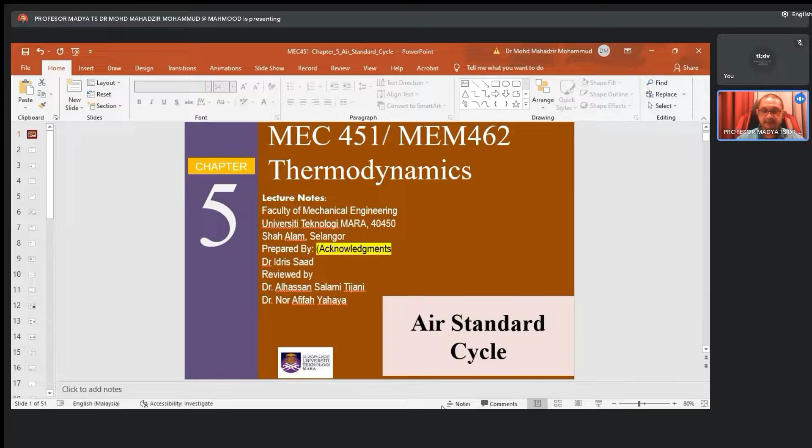Today class, we will discuss the diesel cycle, the ideal cycle for compression ignition engines. For your information, for this topic the outcomes for students is that you should be able to solve problems based on the diesel cycle.

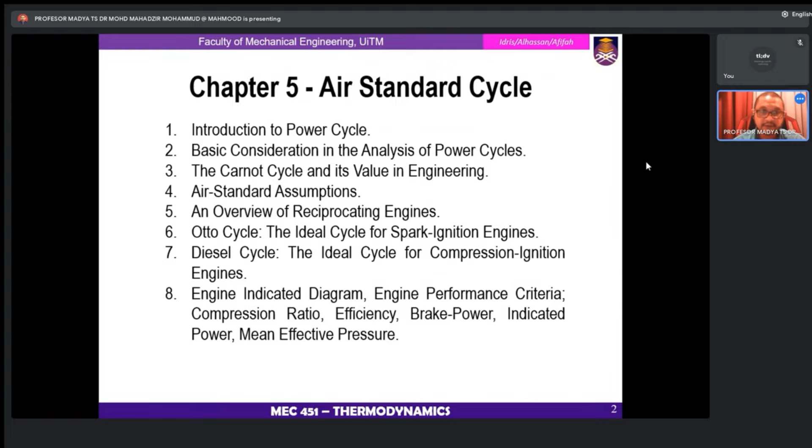Introduction to diesel cycle. Diesel engines, or correctly known as compression ignition, or CI engines, is an internal combustion engine (IC) in which ignition of fuel that has been injected into the combustion chamber is caused by the high temperature which the gas achieves, i.e. the air when greatly compressed.

At adiabatic compression. So the diesel engine was proposed by Rudolf Diesel in 1892, which would require much higher compression than is needed for compression ignition. So this idea was to compress the air so tightly that the temperature of the air would exceed that of combustion.

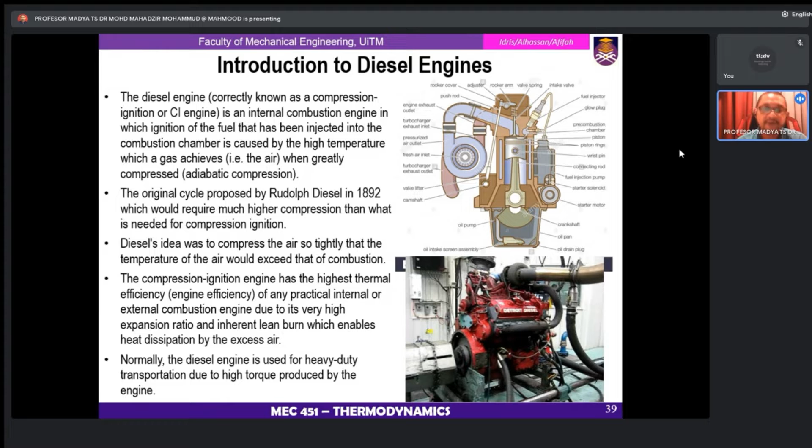This engine has the highest thermal efficiency of any practical internal or external combustion engine, due to its very high expansion ratio and inherent lean burn, which enables heat dissipation by the excess air. So normally these engines are used for heavy duty transportation due to high torque produced by the engine.

So for CI engines, it also has four-stroke engines. Basically, the difference between diesel engines and gasoline engines is that in diesel engines, the fuel is sprayed into the combustion chamber through a fuel injector nozzle, just when the air in each chamber has been placed under such great pressure that it's enough to ignite the fuel.

So when we want to make a comparison between gasoline and diesel engines, one of the factors that's different is that in the diesel engine, it has a fuel injector that is placed where the spark plug is in gasoline or petrol engines. As you see in these pictures at the right, this is a view of what I'm talking about.

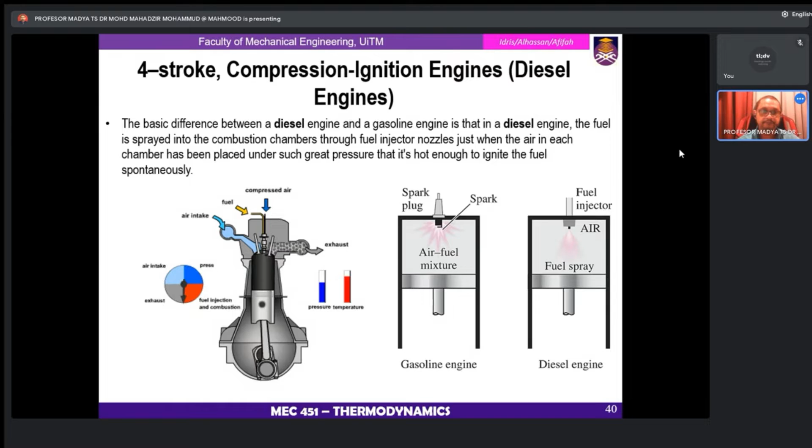At the left side, this is the process or what happens in the cross section of the diesel engine. For four-stroke engines, as we learned in petrol engines, it has four processes. It's the same in the CI engine or diesel engine. For four strokes, it's also the same as petrol engines. This is what I'm talking about with the four-stroke engines.

Stroke number one is the intake stroke, where at the left side, the air has been inducted into the combustion chamber, and in this situation, the intake valve is opened.

Then at stroke number two, the compression stroke, the intake valve closes and also the exhaust valve closes, and the piston in the cylinder will compress the air until it comes to the power stroke.

Process number three, or stroke number three. At this situation, what happens is the fuel is injected into the combustion chamber, and the fuel and the hot air from the compressed air will burn itself, and then push the piston downward with a powerful combustion.

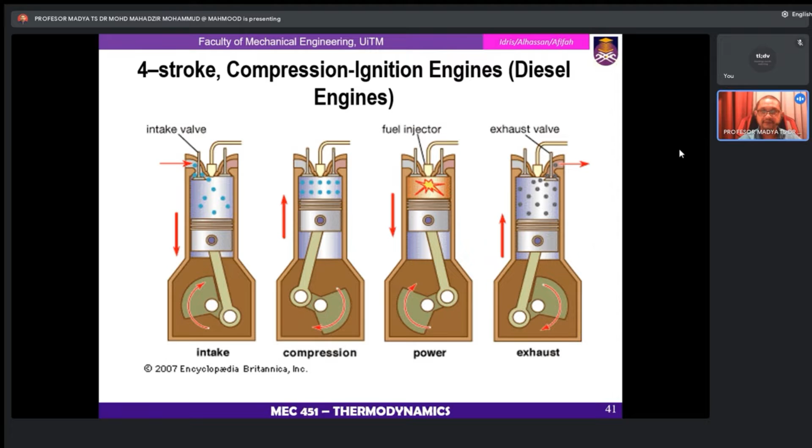And then lastly, for stroke number four, the exhaust valve will be opened, and then all the mixture, or combustion mixture, will be pushed out to the environment within the exhaust, through the exhaust valve and also to the exhaust. That is the process of the four-stroke diesel engine.

For the thermodynamics, we want to discuss or learn about the analysis and the calculations based on the compression ignition engine, and the cycle that is compatible for these compression ignition engines, or diesel engines, is called the diesel cycle.

At the left side is the actual process that happens in the diesel cycle, when we draw or get the result from the engine indicator diagram. But when you want to make the analysis and also calculate some of the efficiency of this engine, we have to make, or we have to consider, some assumptions.

Okay, so to do so, you have to assume, or you have to make the cycle as an ideal cycle - the ideal diesel cycle, as shown on the right side of this slide.

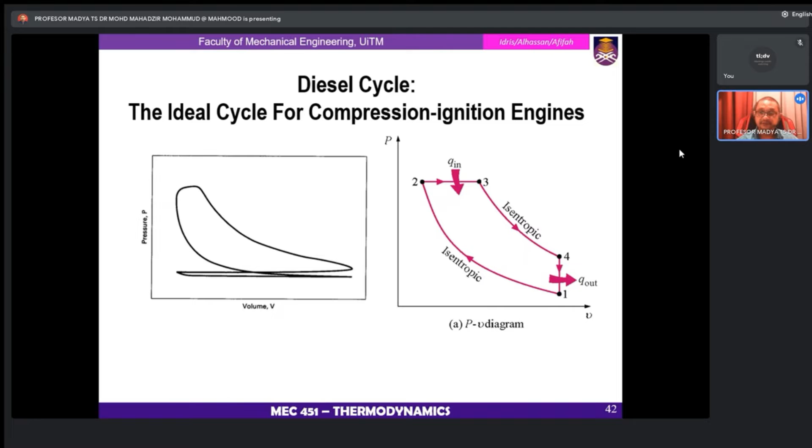To analyze these processes, some related formulas can be used, same as for petrol engines. For isentropic compression, you can use the formulas for the isentropic process in gas phase - that means three properties related formulas: ratio of pressure, ratio of volume, and ratio of temperature, because these three properties can only be used in the isentropic process. At this situation you can also calculate the work for process 1 to 2 using this formula, which is for isentropic compression.

For process number 2, the related formula used is Q in - that means the heat applied to the diesel cycle or diesel engine. To calculate Q in for this system, you use the formula mCp delta T. I will explain how to get this formula, and also from the general equations of combustion efficiency, or using mass of fuel and the calorific value of the fuel, you can also calculate the Q in.

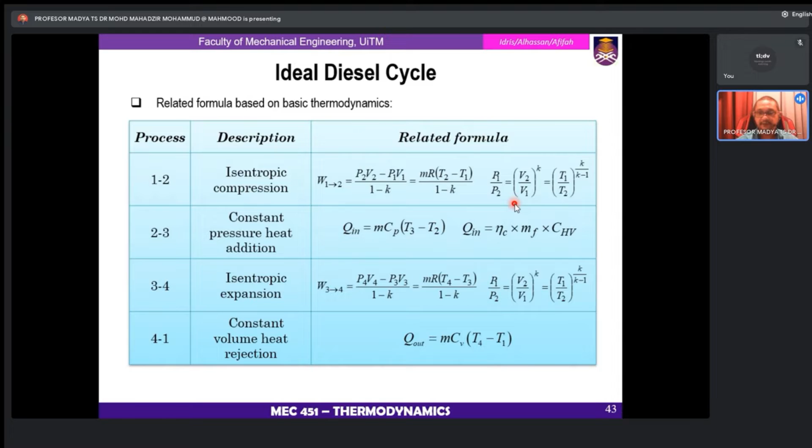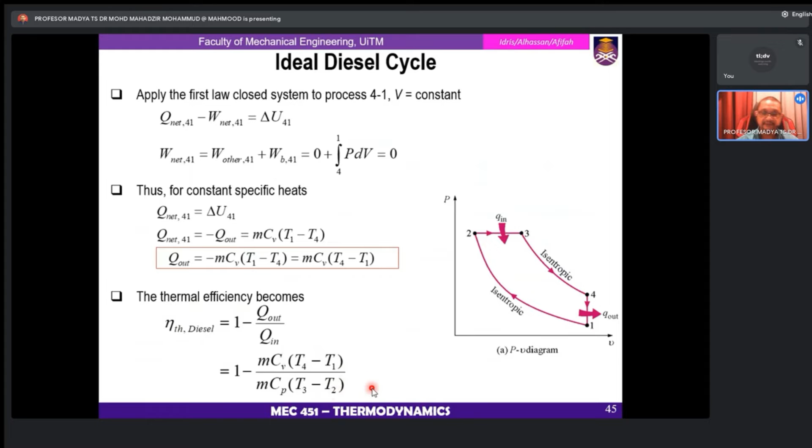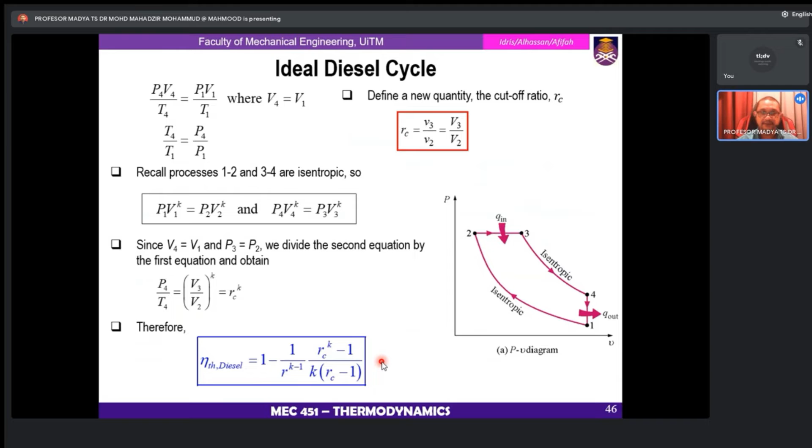This is the diesel cycle that has been finalized. A favorite question is to derive the final equation of diesel's thermal efficiency. I will show you the derivation of how to get the diesel thermal efficiency.

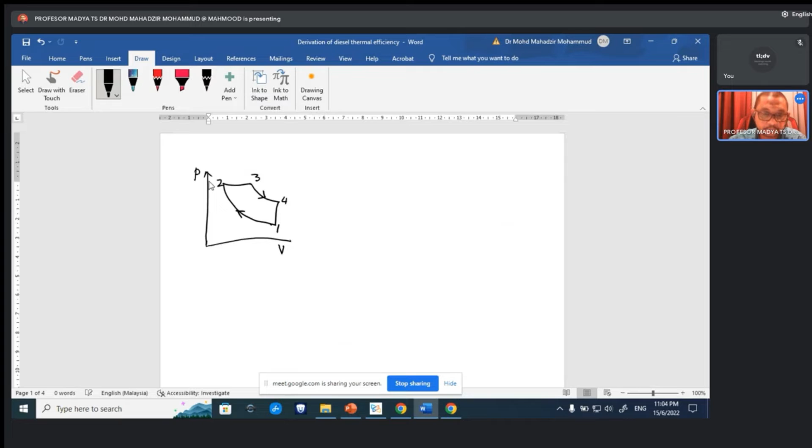Firstly, we draw or sketch the PV diagram of the diesel cycle. State number 1, number 2, number 3, number 4. This is Q in, Q out.

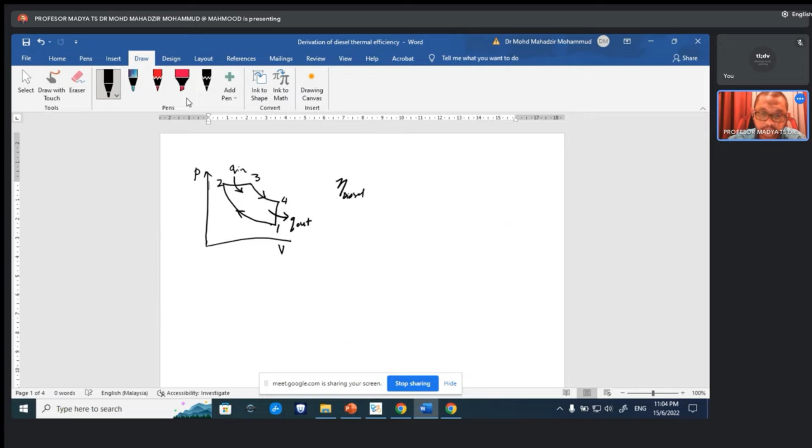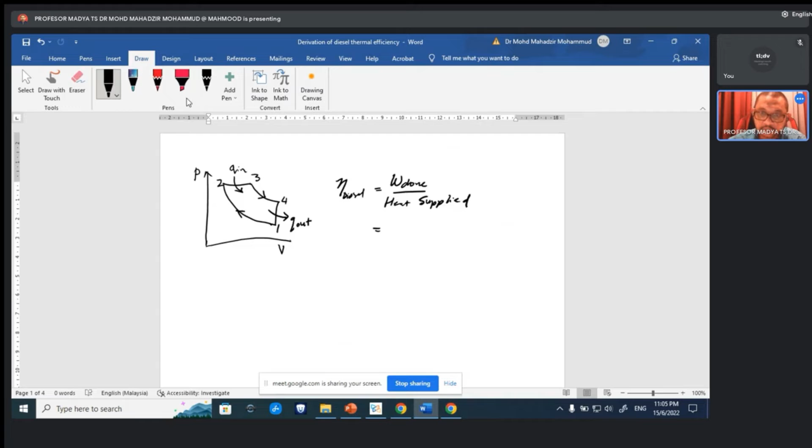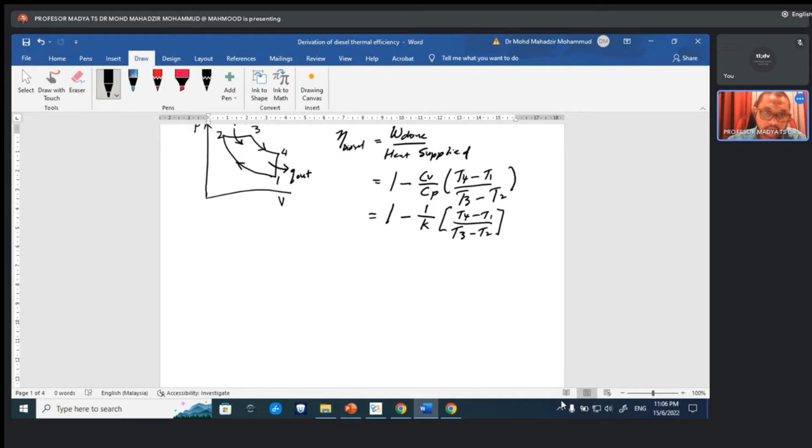Okay, then this is the general equations. From here we know that the compression ratio is V1 over V2, cut-off ratio is V3 over V2, and expansion ratio is V4 over V3.

V4 over V3 can also be written as V1 over V3, which equals V1 over V3. We can also write this as V1 over V2 times V2 over V3, where this is the compression ratio, and this one is the inverse of cut-off ratio, 1 per RC.

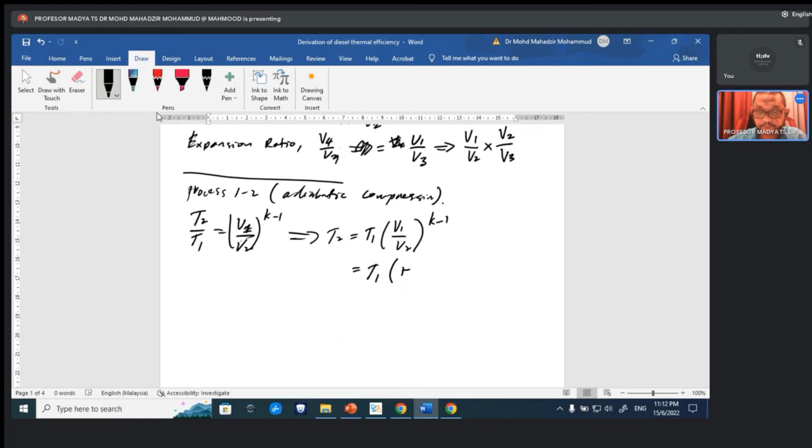T2 over T1 equals V1 over V2 to the power of K minus 1. From here, T2 equals T1 times V1 over V2 to the power of K minus 1, which equals T1 times R to the power of K minus 1. This is equation number 2, where R is the compression ratio.

From the fuel cut-off ratio, RC is equal to V3 over V2, and it is also equal to T3 over T2. This comes from PV over T equals constant, so PV over T at state 3 equals PV over T at state 2. At process 2 to 3, this process is constant pressure, so V3 over V2 equals T3 over T2.

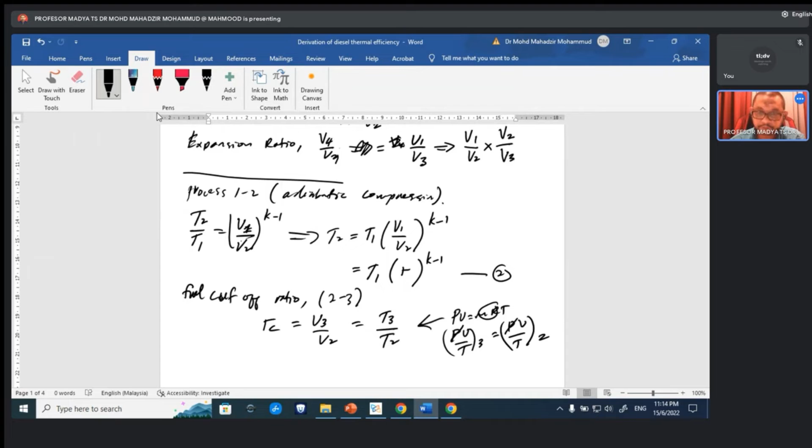So we rearrange, T3 equals RC times T2, since V3 over V2 is the RC ratio. This can also be equal to RC times T1 times R to the power of K minus 1. This is equation number 3, in terms of temperature T3.

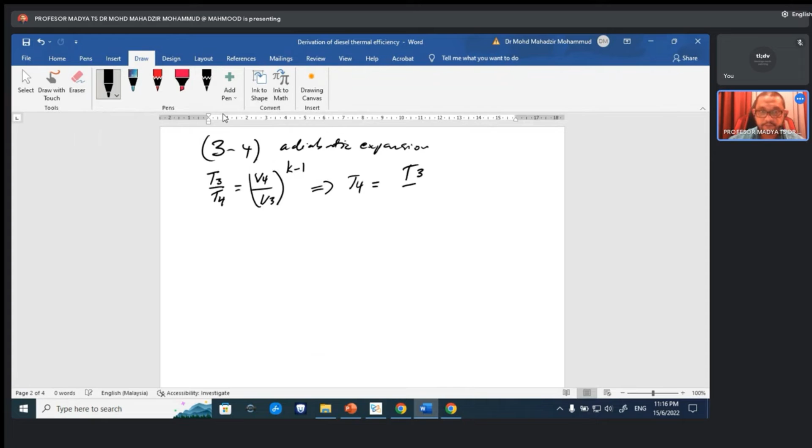Now we look at process 3 to 4, there is adiabatic expansion. This adiabatic expansion can use the isentropic relationship, ratio T3 over T4 equals V4 over V3 to the power of K minus 1. So T4 equals T3 over V4 over V3 to the power of K minus 1.

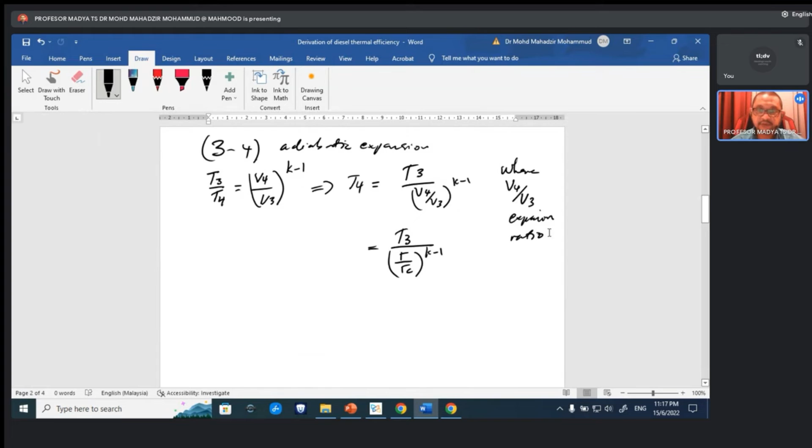So T4 equals T3 over R over RC to the power of K minus 1, where V4 over V3 is the expansion ratio. So when we combine, this becomes R over RC, and this is R over RC, representing V4 over V3.

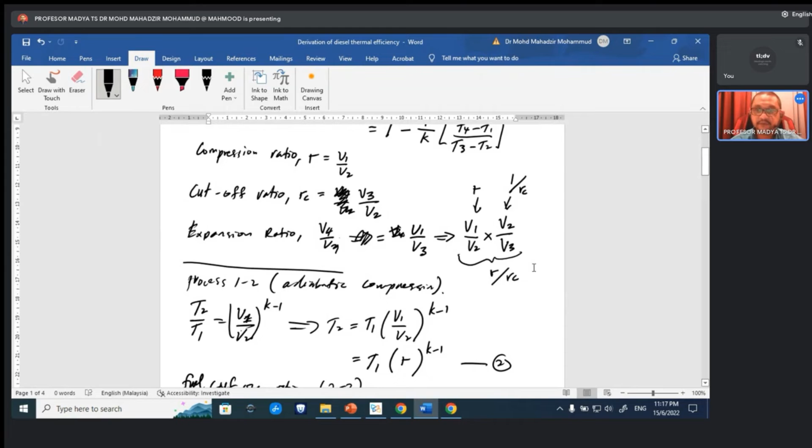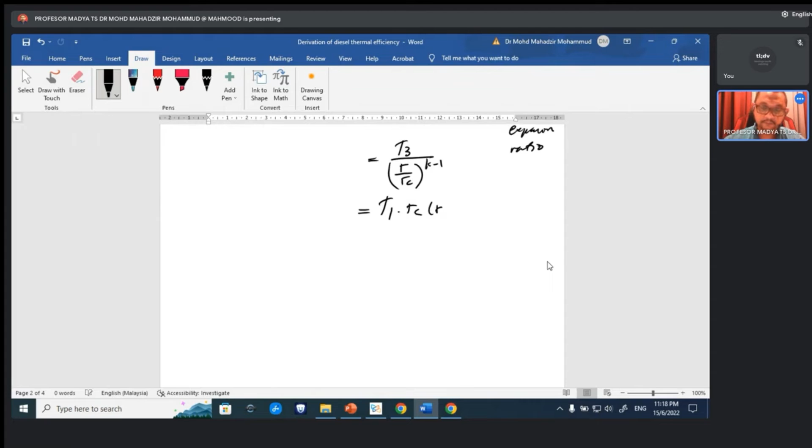That's why we put R over RC in here, and T3 is T1 times RC times R to the power of K minus 1, over R to the power of K minus 1, times RC to the power of K minus 1. We can simplify this, and lastly it becomes T4 equals T1 times RC to the power of K.

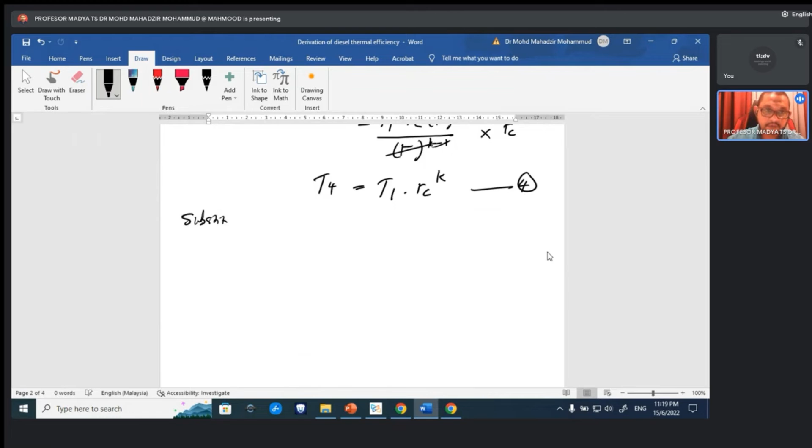Then this is equation number 4. So we substitute T2, T3, T4, that means equations 2, 3, and 4, into eta equals 1 minus 1 over K times T4 minus T1 over T3 minus T2. We put all these together into this equation.

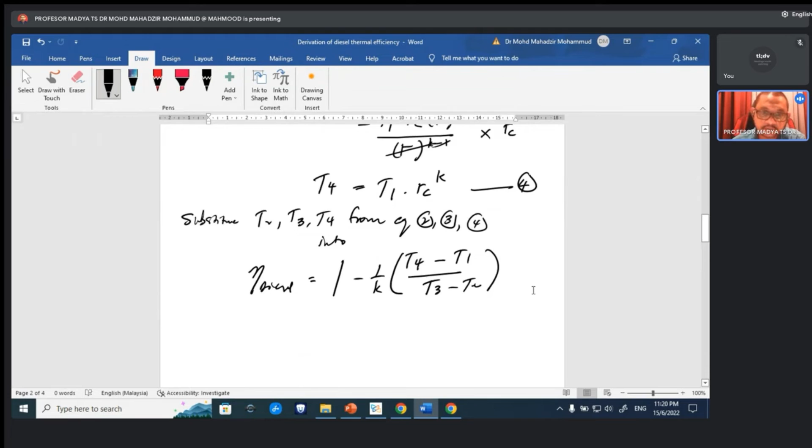Then it becomes 1 minus 1 over K times, T1 times RC to the K minus T1, over T1 times RC times R to the power of K minus 1, minus T1 times R to the power of K minus 1.

Okay, it will be like this, and then we simplify this equation: 1 over K times T1 times RC to the K minus 1, over T1 times RC times R to the K minus 1, minus R to the K minus 1. One minus 1 over K, times R to the K minus 1, close bracket, times RC to the K minus 1 over RC minus 1.

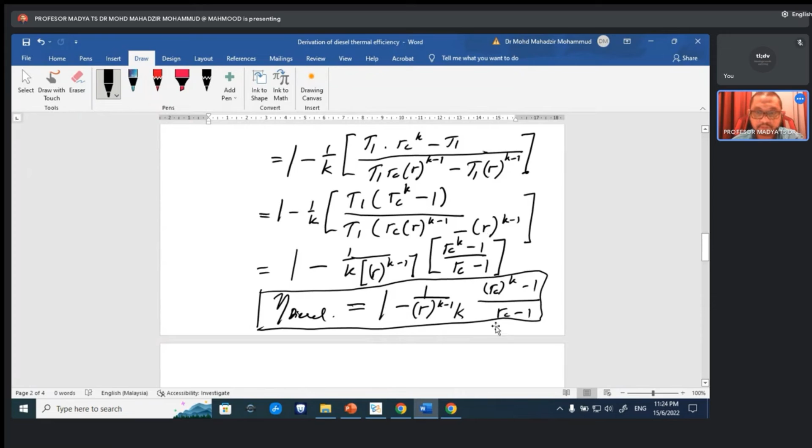Okay, so this is how you derive the thermal efficiency of diesels from the basic general formula, from W net over heat supply, until you get the simplified eta formula for diesels as shown in the slide. Hope you understand this derivation.

Okay, to understand more about these diesel cycles, let's look at the sample problems. Problem 5.2: an air standard diesel cycle has a compression ratio of 18 and a cut-off ratio of 2.5. The state at the beginning of compression is given by pressure equals 0.9 bar and temperature 300 Kelvin. Calculate: 1) the thermal efficiency of the cycle, 2) the maximum pressure, and 3) the mean effective pressure.

Okay, to solve or analyze these questions, firstly you have to sketch the PV diagram. You also have to remember for diesel cycles, process number 2 is constant pressure, so you draw 4 processes, 2 isentropic processes, as this is an ideal diesel cycle. Process number 2 is constant pressure, where Q in occurs, and process number 4 is constant volume, where Q out is obtained.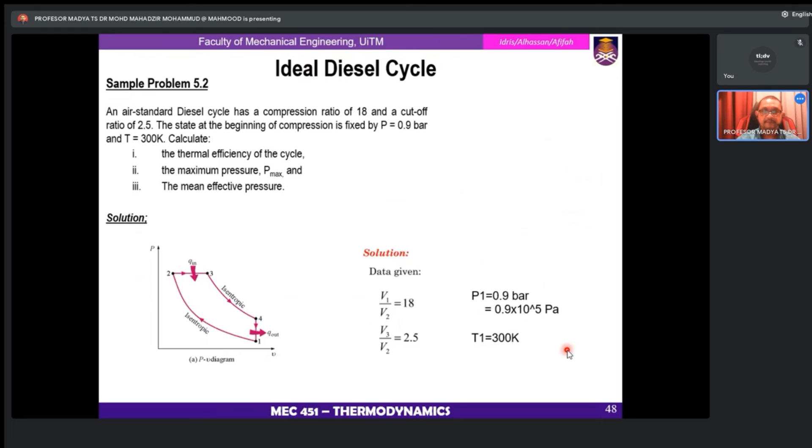Then we start with process 1-2, which is isentropic compression. For this process, you use the isentropic formula: ratio of temperature equals ratio of volume powered by K minus 1. Why use volume, not pressure? Because at this process we only know the volume. So when you want to find temperature, T2 equals 953.3 Kelvin.

Then process 2-3 is constant pressure heat addition. For this process, use the relationship of ideal gas PV equals MRT. So you ignore or cancel out the constant values, and you get V2 over T2 equals V3 over T3. This is used to find temperature. The formula used to find T3 is based on the ideal gas approach.

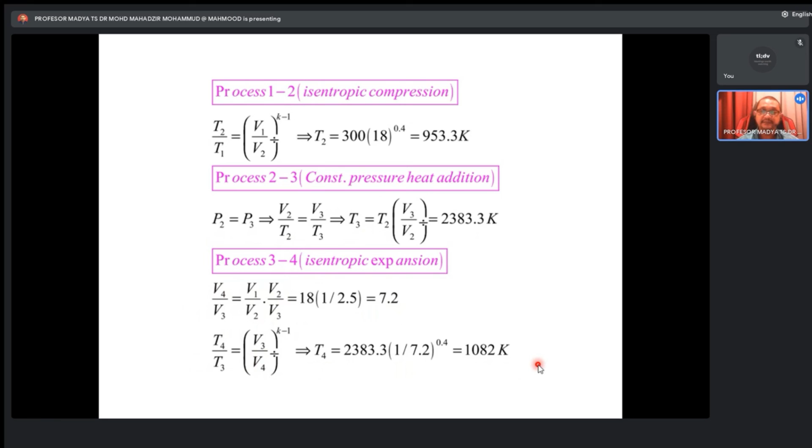Substituting this value into the isentropic formula, then you will get T4 equals 1082 Kelvin.

Now we will find Q in, Q out, and W net, because in the formula for thermal efficiency of a diesel engine, all these values are needed. So Q in uses the formula M Cp delta T. Substituting all the temperatures and Cp determined earlier, we will get Q in, Q out, and lastly W net.

Putting all these values into the thermal efficiency of diesel engine formula gives 60.93% for thermal efficiency. Then for P maximum, from theory and knowledge of thermodynamics, at process number 2, P2 equals P3, which is P maximum. So find P2 using this formula.